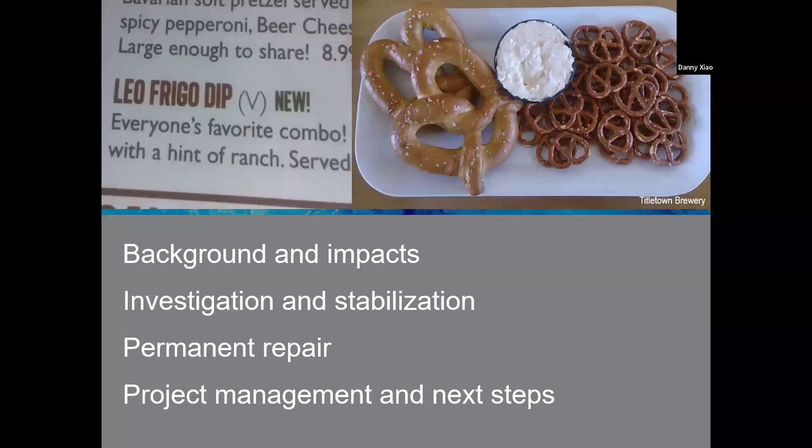So the good people in Green Bay, they had a sense of humor about it when this bridge closed. They actually came up with an appetizer for that called the Leo Frigo dip. So, all right. So first a little bit, we're going to touch about this to help orient us. One thing I want for not just the folks here in the room, but also online to understand, we're not using some sort of a fisheye lens camera, Photoshop, etc. Every time you look out at this roadway and you see the dip, that's real. That's not exaggerated in any way.

It's a 2-foot dip. So again, to get us oriented, some fundamentals talk about what we refer to as day zero, how the emergency relief process comes into place, some of the initial PI and traffic that we had to consider, as well as construction impacts for the US 41 project that was underway.

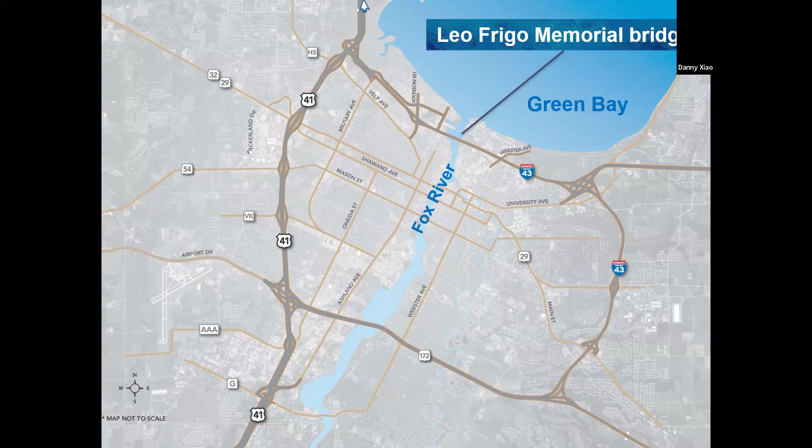So again, to orient ourselves on the map, the Leo Frigo Memorial Bridge is there at the mouth of the Fox River, where it gushes into Green Bay and ultimately into the Great Lakes. It's in those final couple miles of Interstate 43, which you see kind of wrapping around and then heading down along Lake Michigan to Milwaukee, and then obviously to Rockford. US 41, which is now Interstate 41, continues to the north towards Michigan, also heads to the south, taking a different path towards the Milwaukee metro area.

So a few fundamentals about Leo Frigo. Again, keeping in mind, we're talking about 2013. So Leo Frigo opened in 1980. It was called the Tower Drive Bridge. It is a tied arch bridge. That's a special kind of bridge. It has two siblings here in the state of Wisconsin. The Hoan Bridge, which is on Milwaukee's lakefront, and the Bong Bridge, which is up in Duluth Superior. Now you're like, wait, aren't all those ports? Yes. That's why there's 120-foot navigational clearance over the waterway so that they can get the boats underneath.

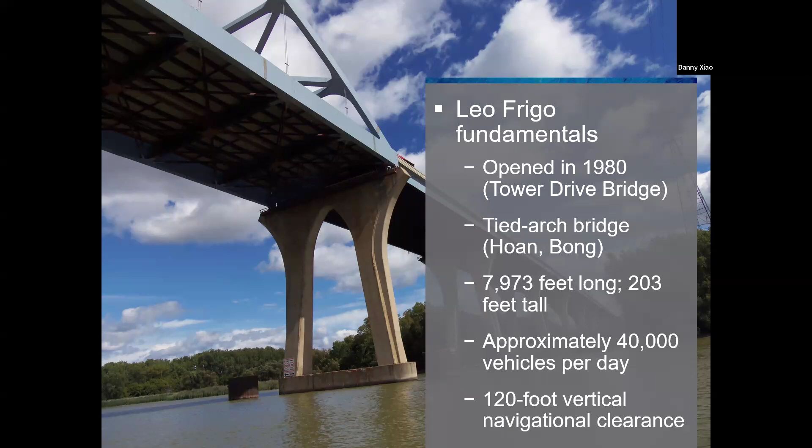So Leo Frigo, about 8,000 foot long, couple hundred feet tall, at the time was carrying over 40,000 vehicles a day, which was appropriate for the 4-lane freeway crossing that it was. So like if you ever go into the doctor's office and they're asking you about your health history, this is the health history of Leo Frigo. Again, born in 80, had a little structure repair in 88, some asphalt overlay, little structural work in 2012, 2013. It actually had been inspected a little more than a year before the event, and it came out fine.

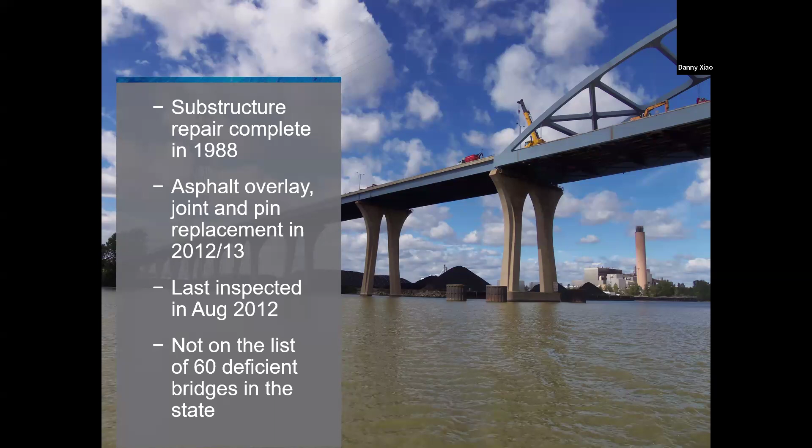So there was nothing in that structure's health history that would suggest that something interesting and devastating was about to happen. I don't know. That's your next question to deal with. I'm going to just roll on.

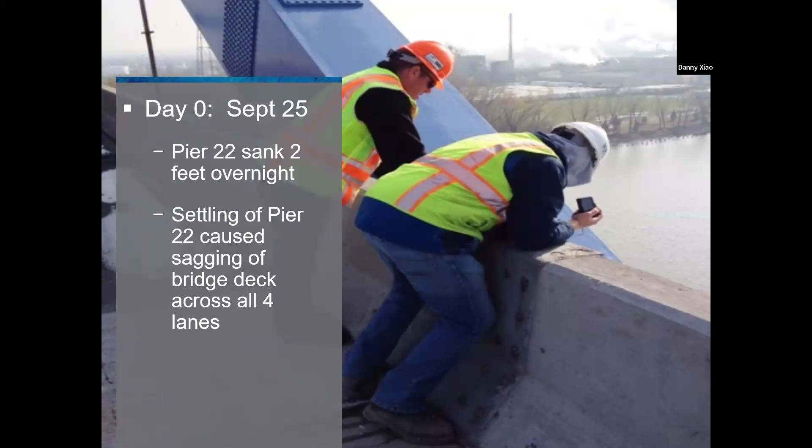So day zero, September 25, 2013, Pier 22, one of the supporting structures of that bridge, sank 2 feet overnight. And that settling of Pier 22 caused the sagging of the bridge deck across all 4 lanes. So just to orient us again, over to our far left is the Fox River. So that's in essence the middle of the bridge. And this was about 5 piers east of the river. That's the epicenter of the location of the sag.

So on day 0, September 25th, the incident first starts getting reported into law enforcement around 2:30 a.m. Within 12 hours, there's a news conference in a nondescript DOT regional office building. The governor and the secretary of transportation flew up there. This thing was carried live all across the state because it's not every day that a bridge sags 2 feet. In fact, arguably, it's something that you almost never hear about.

And so it immediately piqued international interest. So, you know, back in the day, if you were watching a network news show, they would probably show like 30 seconds of, you know, meanwhile in Green Bay, Wisconsin, the bridge mysteriously sagged 2 feet overnight. So a lot going on.

There we go. Whoops.

Okay. Following day in the Green Bay newspapers, obviously front page headlines, just showing again that significant dip, not exaggerating in any way. And so at that moment in time, September 26th is day 1.

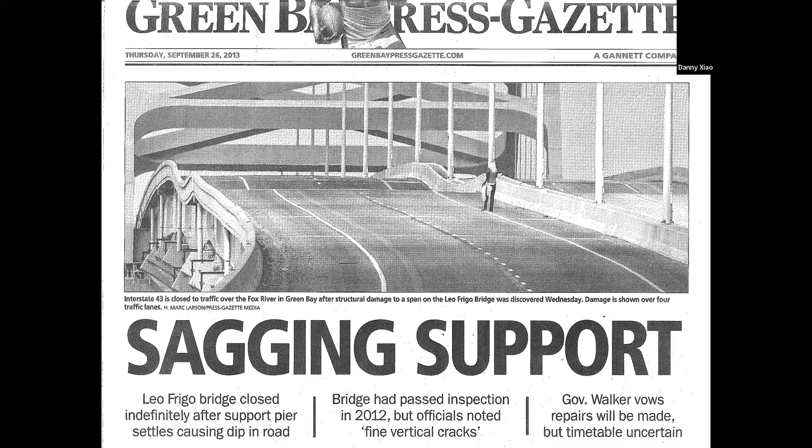Most bridge incidents, most transportation emergencies that happen, be they a flood, be they a fire, perhaps somebody left too much traffic control materials next to a bridge and it started on fire and melted it, or a fuel tanker flipped and burned and melted it. What caused this? We had no idea. So therefore, we had no idea of when it would be back open. So clearly, we had everyone's attention in the Green Bay area as well as in the state of Wisconsin.

So on the second day, and I think for folks down in the Milwaukee area most recently, but certainly all over the state, whenever we have some type of a catastrophic event that impacts infrastructure, the first step is to get a proclamation of emergency. So on day 2, the governor signed this proclamation, and that's the first step to pursue federal emergency relief funds through the federal aid highway program. Now, they can be used for one of 2 things, which is natural disasters as well as a sudden catastrophic failure like we saw here.

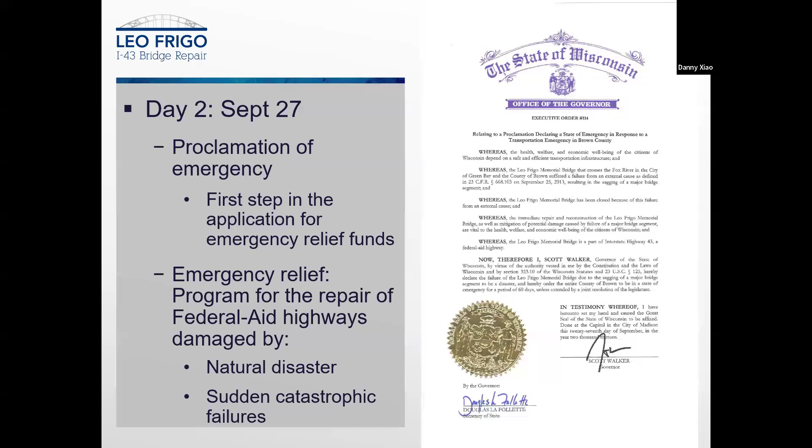Now, one thing that we did as a little bit of levity, but also to underscore the seriousness of the situation, is we actually printed out copies of that declaration. And when we'd have meetings and people would talk about how, oh, well, we need more time or we need to check in, we would kind of roll out the emergency declaration and say, yeah, but we're going to need you to decide in the next hour. We're going to need a decision at this meeting. We don't have a lot of noodling time on it. And so that was very effective.

Now, from a budget tracking standpoint, of course, any money that flows in has to be accounted for. And what helped us is that we were already in the midst of the roughly $1.3 billion Interstate 41 reconstruction project up in both Green Bay and Oshkosh. So from that standpoint, we had a lot of the tools and the tracking in place to help us know where all the costs were going to. A lot of FHWA coordination along the way. And some of the things that were required in terms of different cost categories included, of course, the flat out cost of construction. But there was a lot of engineering that went into that.

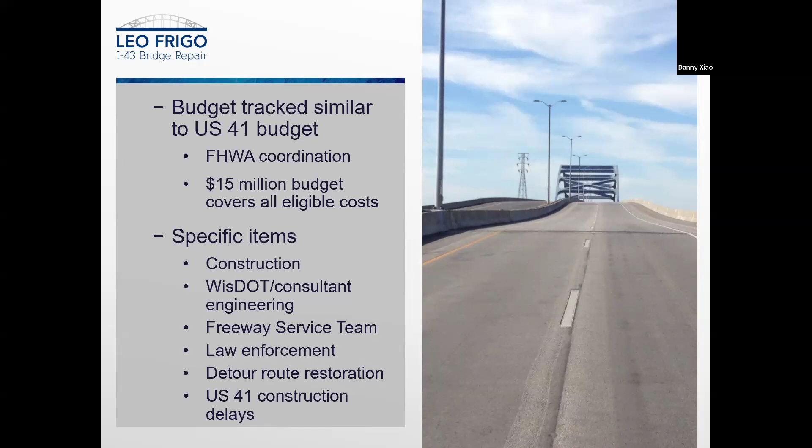In order to help manage the traffic, we had this group of vehicles called a freeway service team that would be out there to help clear motorists off the road, change a tire, give them a gallon of gas and get them on their way. Additional law enforcement support in order to keep things rolling, as well as the detour routes. Some of the detours initially weren't roads that are necessarily built for interstate traffic. And so there was a need to do some restoration of those as well.

So in those first few days, as you can imagine, as with any breaking news story, public involvement was pretty intense. This again is another shot from that initial day 0 conference. And really the focus was on 3 things. Danny actually mentioned it at the front when he was talking about what we do. Number 1 was safety, making sure that we were keeping the motoring public safe, as well as the individuals who were charged with going in and kind of unraveling this mystery. Also, alternate routes, helping people, even though this major artery's been shut down, to continue to move around. And then underscoring the investigation and commitment to repair.

So this is not like one of those CSI kind of shows where you're able to just go in and by minute 57, you've got everything figured out. But yet that's kind of the appetite of folks, that we'll be able to just click our fingers and get the answers right away. And so just letting folks know that we were on the case, we're making progress, but it was going to take a little time.

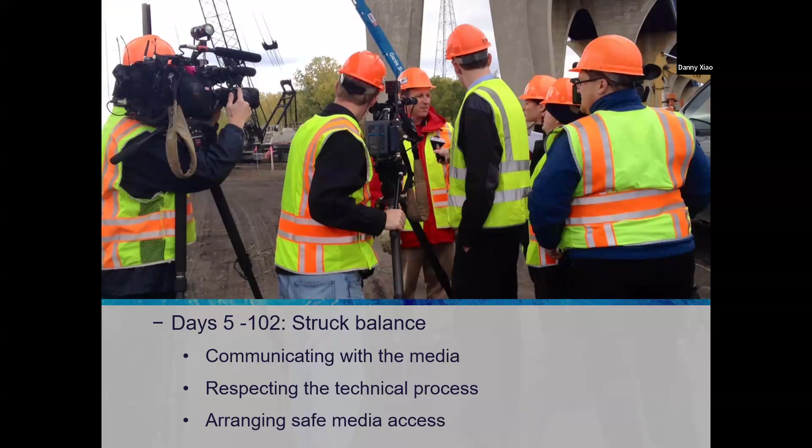So once we moved past that initial burst of media interest, then it was about making sure that people would still have questions. And so recognizing and needing to satiate that curiosity is making time, making availability. So sometimes we were able to host an event like this out on the actual site, after giving the media folks their appropriate PPE in terms of hard hats and vests.

And then just sharing with them kind of where we were with things on the project, which was, again, important to keep them safe, but important because unfortunately, sometimes if not granted those opportunities, folks will take unnecessary risks that could result in themselves getting hurt or even killed. So again, we were working together, sharing the public interest.

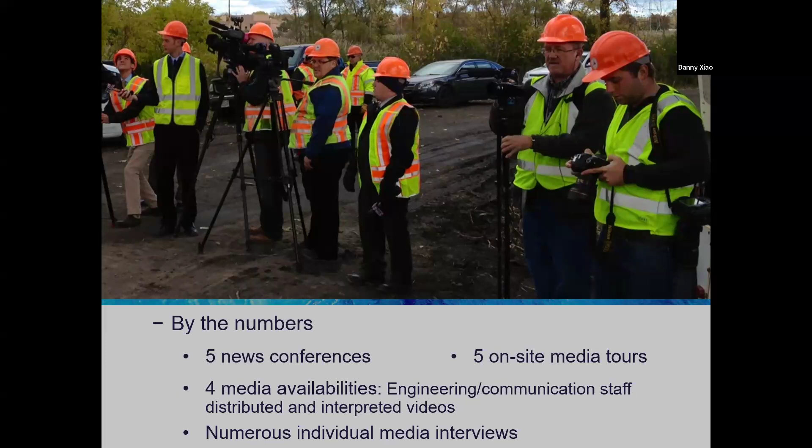There's another briefing that was held up there. So we had 5 news conferences as well as 5 kind of on-site media tours. Sometimes it would be as simple as just letting folks know, hey, we're going to have somebody from the project there for a couple of hours. Did you want to come in, ask them a few questions, film it so that you could then show it on the news. So definitely a lot of media interest, not just from the Green Bay market, but from the Madison, Milwaukee, and Wausau markets as well.

So at the end, the newspaper published a rather positive editorial, really praising everybody together who cooperated, worked, and was able to get the bridge back up. And now you're probably saying to yourself, well, Brian, we're like 12 minutes in. That's it? That's all your presentation is? No, we're going to go a lot deeper into a lot more of these issues here.

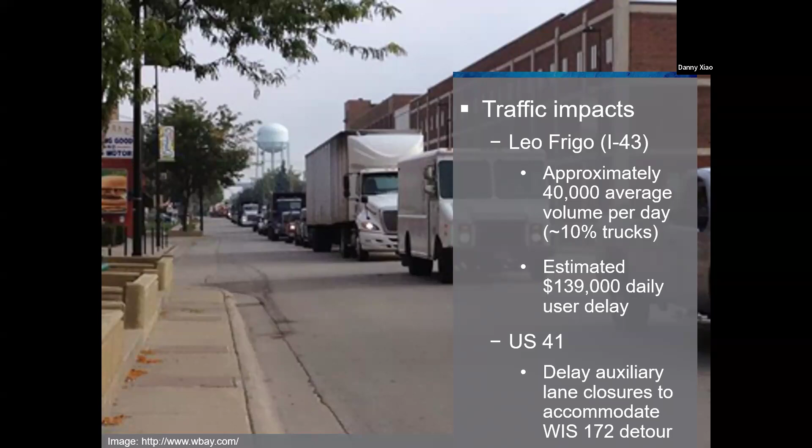Highway 41, Interstate 41, sometimes you're just gonna fall into luck. And in this case, the luck that we fell into is we were about a week or 2 away from a stage change on that interstate reconstruction, where we were about to take away lanes of traffic on Interstate 41, then US 41. Well, as we saw in the previous slide, it was destined to be our alternate route. And so we actually negotiated and paid the contractor to delay that stage change so that we could accommodate more of the traffic on those freeway detour routes.

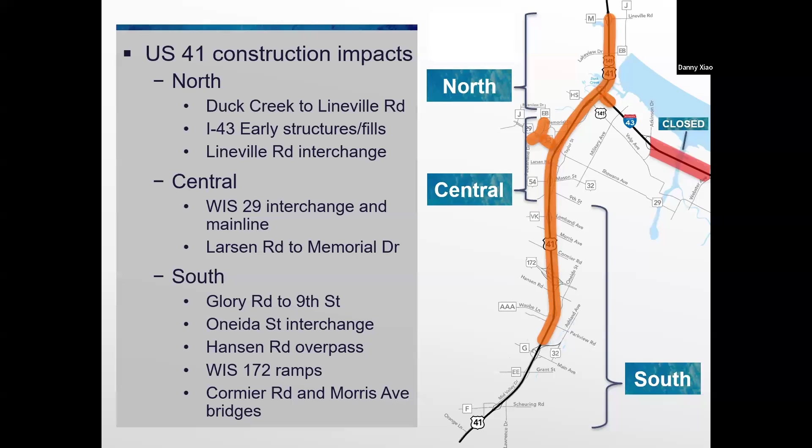So that large green, orange looking thing, which is not a circus balloon animal, is in fact all of I-41 that was under construction at that moment in time. Not going to read the list to you off of the left. Suffice to say, there weren't many opportunities for us to do anything but put folks on 41. And so anything that we could do, again, whether it was the freeway service team or just working to delay some of those critical stage changes in order to make the traffic impacts as little as possible.

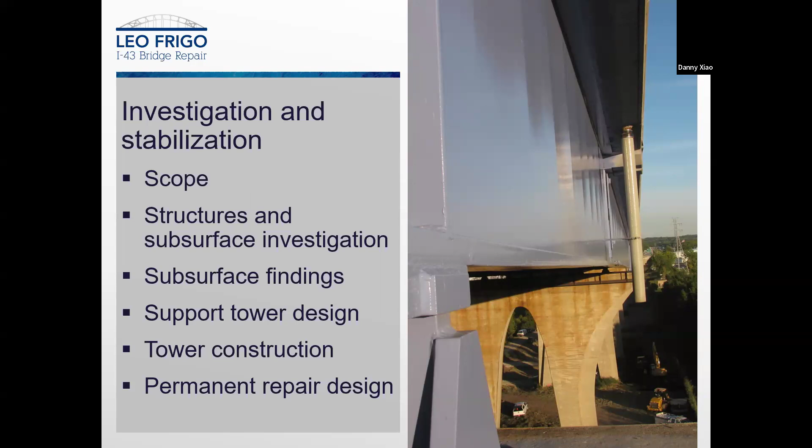So now we're going to zero in from those kind of traffic or public involvement effects into investigation and stabilization of the Frigo Bridge. So those things on the left, we're going to zoom in on each of those in greater detail so that we really start trying to walk each of you through that same sort of engineering inquiry process. When you don't know what caused something and you see the effect, how you work your way toward ruling in or ruling out different things.

So here we are. It's day one. Okay. And part of what we want to do is, of course, do a little recon on the site, look for things that are most obvious, not just on the site, we'll call it at ground level, but at the structure level, which you may recall was up to 200 feet in the air, as well as geotechnical exploration.

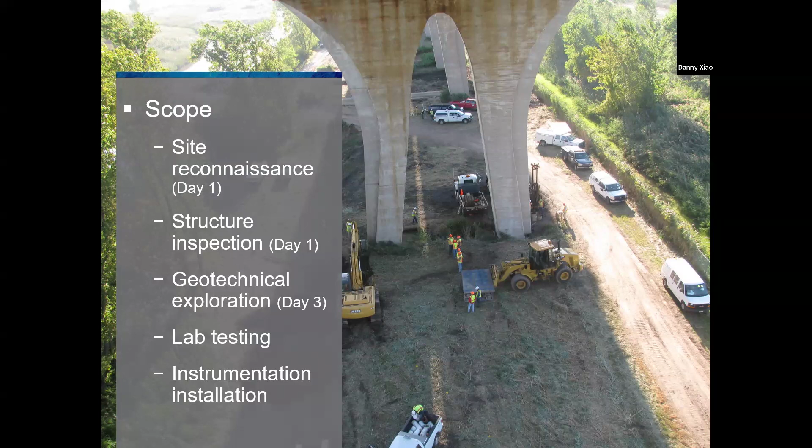And then as we were gathering this information, working with our partners to test things, to install instruments, to try to get more understanding of what some of those root causes are. So starting with structures, again, your bridge pier just sank 2 feet. You probably should not go rolling up there with heavy equipment. And so we wanted to take a real systematic approach, starting first with both the structure and the deck.

And so we wanted to make sure that we had a warning system in place that if it detected movement, it would very quickly and very loudly alert everyone within the area to be able to clear out of the vicinity of that. So again, starting with our core value of safety, we established kind of a red zone near Pier 22. Again, that's the epicenter. We don't know what's going on, so that's the area we want to be the most careful about.

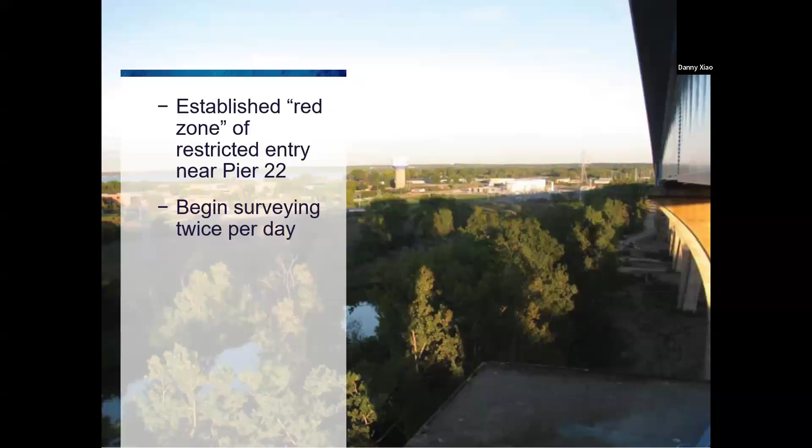Now, part of what we did to determine what additional movement may occur, we set up and started surveying, taking survey points twice a day, just to again confirm in our minds, are we seeing any movement, a little movement, or a lot of movement?

Now, this is October right now here. It's raining outside. It's fabulous. So Green Bay is a lot further north and east of here. And sometimes it rains in September. It's not always dry in September.

So with the structure inspection came structure inspection challenges. So here's a scissors lift we were hoping to be able to use on that day, and you'll notice that it's buried axle deep in mud. So a lot of the ground that was beneath the Leo Frigo Bridge included that lovely invasive species known as Phragmites and a lot of other muck. I should say ground surface that really wasn't intended to drive on. And so every day was a learning period or an adjustment.

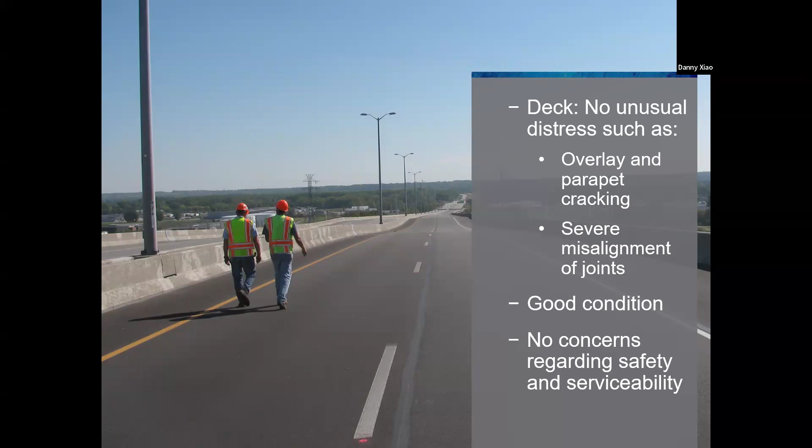So in terms of the structure inspection, they started with the deck, even the part of the deck with the dip in it, and did a physical walkthrough, physical inspection. And, hey, we lucked out. There was not anything unusual. There was a little bit of cracking, but there was nothing really overtly significant. The joints were all still lining up together. So generally things were in good condition. So again, that comment I mentioned about luck, it was one good thing we like to see.

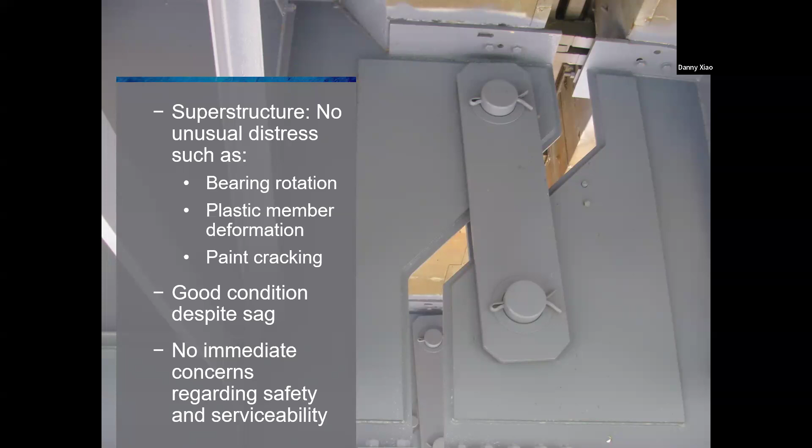So then we move from the deck down to the superstructure. And once again, no unusual distresses. There was certainly a little bit of deformation, but it was in that elastic part of the deformation curve. We hadn't reached the point where things were so deformed that they couldn't be put back. And again, a little bit of paint cracking, but nothing significant. So in spite of the fact that the bridge deck had just settled 2 feet, the superstructure actually looked pretty good. Not really anything immediate that popped out of it.

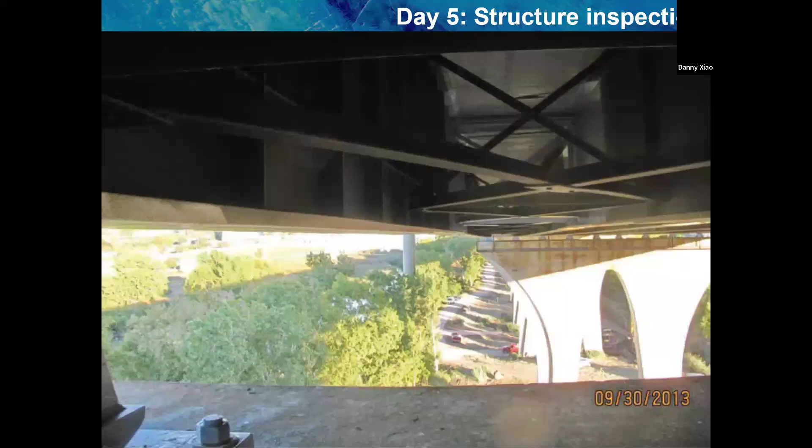And so here's another shot. This is obviously from up in the superstructure from the inspection. As you can imagine, at Pier 22 itself, you would see a little bit of bending because, again, it settled 2 feet. So there's a shot of that.

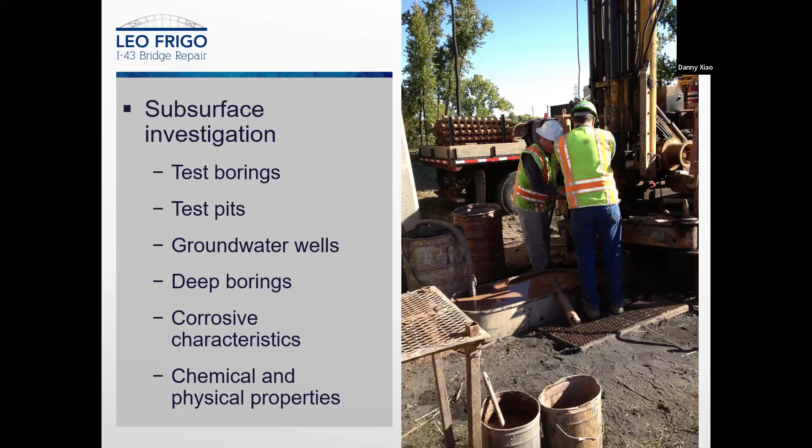So now that we had kind of examined and cleared the structural aspect of it, it was time to turn our attention to the subsurface investigation. And, again, we undertook a really rigorous regimen of trying to look at what was going on because the bridge settled. It didn't happen from the top, so there must be something going on. So test borings, looking at groundwater and corrosivity. So even for those civil engineers like ourselves that maybe aren't heavy into the chemistry and biology aspects of it, we're going to be doing a little recollection of what that would look like.

That's what we were doing because we knew we were on the clock. So it was like, well, what if it's microbes, like actual living cellular beings that are doing things? And what about the corrosiveness? What about electricity? So a lot of different things, some of them, as it turned out, we were able to rule out. But when you're on the clock, you pull out everything.

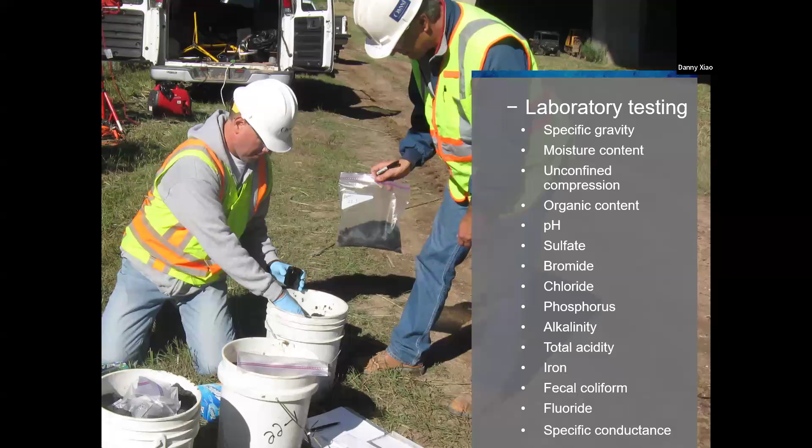We're not going to read this list to you one by one, other than you probably will recognize them a little bit from some of your geotech engineering courses and probably some from your chemistry courses as well. But that's just kind of the laundry list of the lab testing.

So as we were going through the testing, we were starting to zero in on some potential causes. Was it something to do with the piling? Again, we hadn't at that point gotten to that, but we were beginning to have our suspicions that might be an aspect of it. Another, bedrock cavity, which is not Fred Flintstone with a toothache. It's, if you can imagine, an open area beneath the bedrock where, for some unknown reason, suddenly that cavity collapsed, or something with the soils. But again, more to follow as we work our way through this investigation.

So on day 3, that alarm that we saw there previously, yes? Tell us a little bit about how you're starting. We will. Absolutely. Great question. For those of you online, he was wondering, get a little bit more info about how the pier was constructed. And the footings that will become very important here.

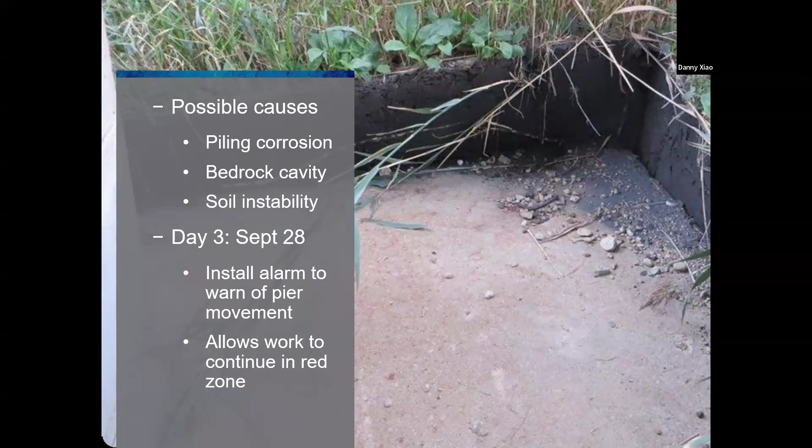So on day 3, we were able to get those alarms installed, and it allowed us to get down in there. Day 4, again, we're down there, we're looking at Pier 22, the epicenter, and they did a test pit. They looked at one test pit, and there's a shot of what that looks like. And in one corner, they went down 3 feet, and it's like, hey, drum roll, this is it. Smoking gun, nothing.

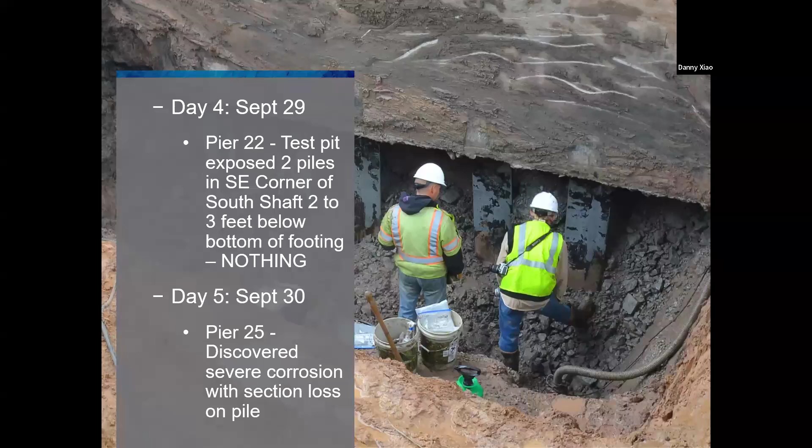Meanwhile, a day later, over at Pier 25, 3 piers away, they found severe corrosion. And they're like, well, wait a second. The pier settled at Pier 22. I'm over here 3 piers away from the river, and now I have corrosion with section loss in the pile. What's going on with that? So day 5, we also found at Pier 21, the pier next door to 22, also section loss.

So it's like, okay, what does section loss mean? So if you can imagine this entire pile being whole, that's what's left of it. Kind of looks like an old steel Pabst can that you found buried out in the field for 50 years. But really, from a construction standpoint, a more serious standpoint, that pile, one of many piles, was intended to exist in its as-built state and extend down into the ground. And now you look at what we have.

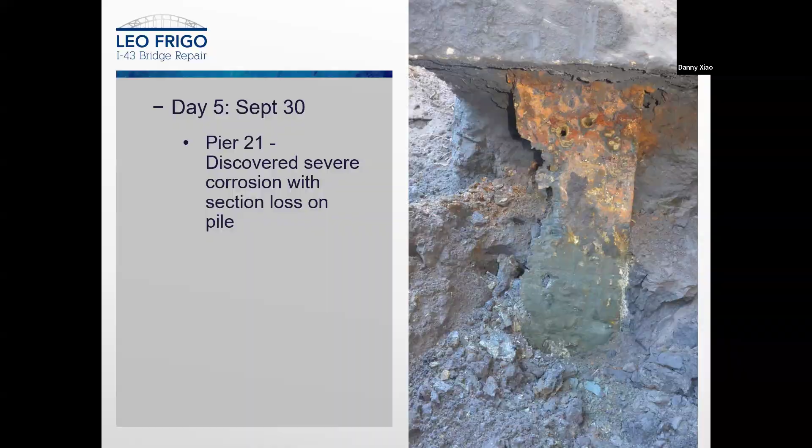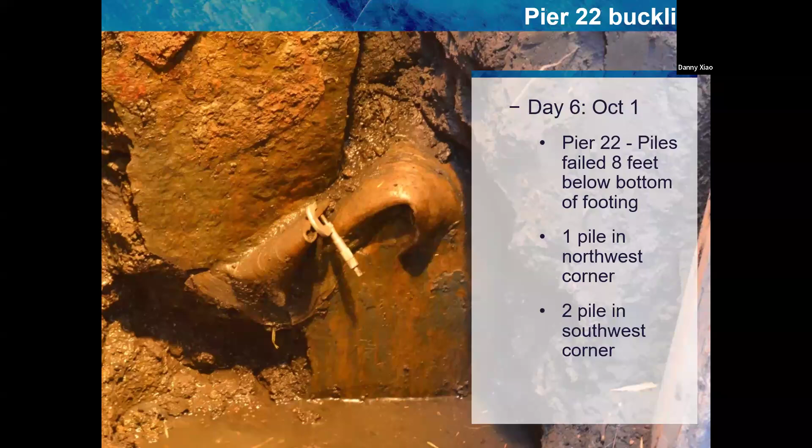And so then that chases the whole investigation piece further, where we go, aha, we have corrosion on the pile, but what was causing the corrosion? So here at Pier 22, if you'll notice how the pile comes down and then kind of bends, basically at Pier 22 itself, it collapsed on itself about 8 foot below the bottom of the footing. So we found that on day 6. And there was 1 pile in one corner and 2 piles in a different one, both of them on the west side, that all failed. And that's again resulting in the Pier 22 buckling.

So in terms of what they found in the subsurface, there were 3 different things that made for, shall we say, kind of interesting or unique conditions. The first is porous fly ash fill. What is fly ash? Fly ash is a byproduct that comes from power plants. Well, how would porous fly ash fill, aka byproduct from power plants, get in my fill under the bridge? Where would it come from? Well, it came from the power plant that happened to have existed right near where the bridge was built.

Perched groundwater. So what that means is, if you can imagine that you have a solid, say, layer of rock, and typically groundwater would go from the ground and then kind of rise up and down.

But it's essentially an impermeable layer. And so if at the time when they were building it, they weren't aware that there were certain layers that were impermeable, it would mean that underneath the ground there would be sections that typically wouldn't be going through the same kind of rising and falling of groundwater that you would typically see.

The third finding is microbial influenced corrosion. And you're like, well, wait. Microbes, like living things? That means that there has to be something living under there. What would that be? Well, it turns out that in addition to using fly ash as fill, they also used a lot of wood pulp byproducts. You're like, well, that's crazy. Where would they find wood pulp byproducts from? From the wood pulp plants that were right there next to where the bridge was built.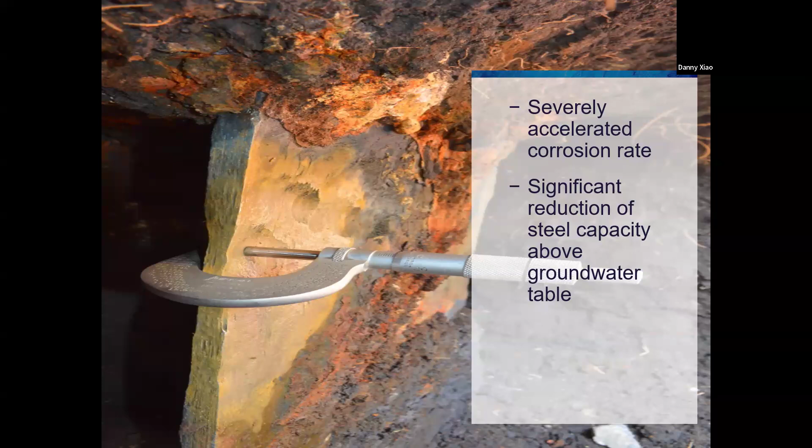So again, built in the 70s. Clearly, we wouldn't today use fly ash or wood pulp byproducts as fill material next to our piers, but hey, it was the 70s, man. So here's another example of the corrosion loss. So again, this is your typical steel pile, and you'll notice with the micrometer that it kind of comes down. Again, particularly above the groundwater table is where we would see a lot of that kind of reduction.

All right, so in summary, now that we have completed our investigation, we found that at a minimum, we need to do some bridge repairs. We've looked for those factors and we found them at 21, 22, 23, and 25. So 24 did not show, we didn't find those there, but because we remember number lines from elementary school, 24 is perched right there between 23 and 25. We're like, well, we'd rather be safe than sorry. So we're just going to look at all 5 of these.

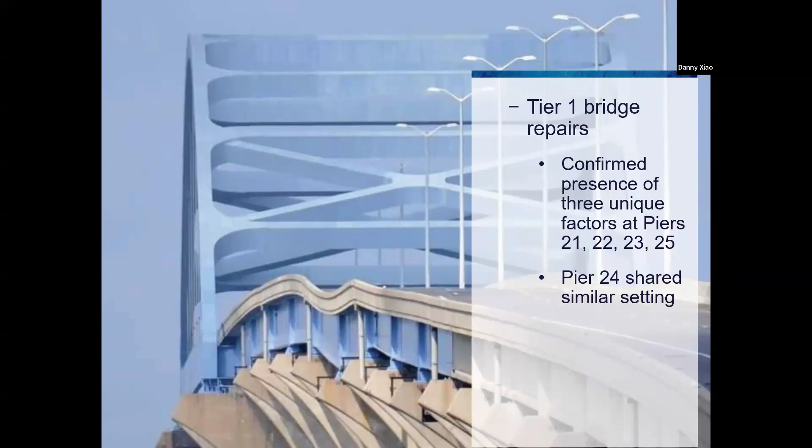So what does a tier 1 bridge repair look like? Well, first of all, it's stabilization. Before we could really dig into a permanent design, at this moment, we didn't know what's going to happen. And so we wanted to stabilize Pier 22, and we wanted to make sure that it would then reinforce the structure so that we would have no further movement. So we began to look at a support tower design. And so just trying to figure out, well,

Iron oxidizing bacteria are common in shallow wells in Brown County. Well, thank you, Ken. As an added bonus, this bridge is in Brown County. So a very relevant point.

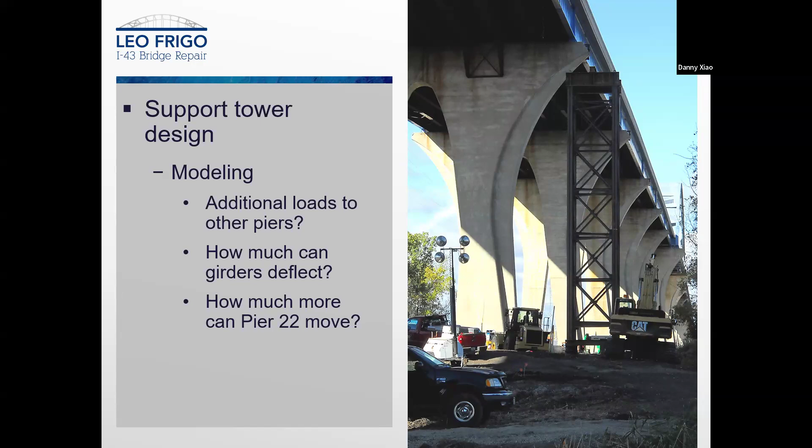Oh, that one. Okay. So it required a lot of modeling to determine what the right thing was in terms of the design. Now, after 12 years, I can finally remember without prompting that DL stands for dead load on this slide. So this upper chart reflects what we would typically expect to see. Hopefully for those of you who've had structural design courses, some of this will resonate with you. When it's in equilibrium, we'll see some areas that will be in tension and others in compression, keeping the whole structure in a kind of balance.

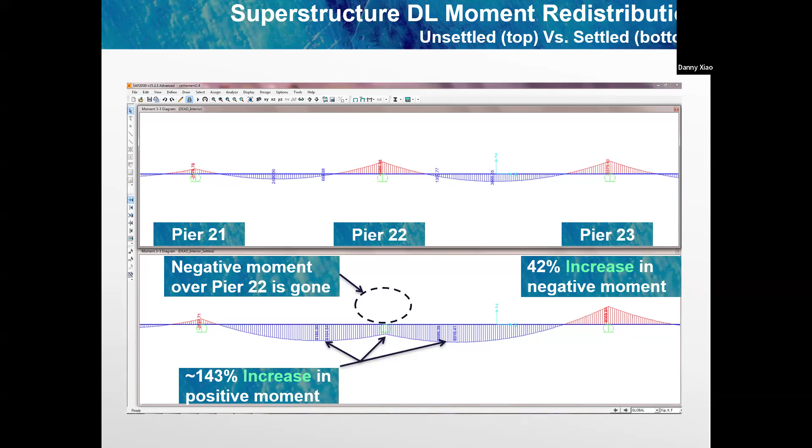Now, this lower exhibit shows that with Pier 22 gone, we're actually resulting in a huge positive moment at that location, as well as a huge negative moment increase on the other side. And I'm gonna skip the slide. And here we go. So they did a lot of structures modeling. Did I mention I'm not a structural engineer? And so the results were that everything was within capacity.

So as you've learned, we have this thing called factor of safety that's built into the codes, that's built into the structural design. This is why you do that, so that if you're 1% off, things aren't going to snap. So everything was in the elastic stress range, which means no permanent deformation, and we could possibly jack it back into its existing position. Again, more good news. How close were we? If that settlement had been another foot, all bets are off.

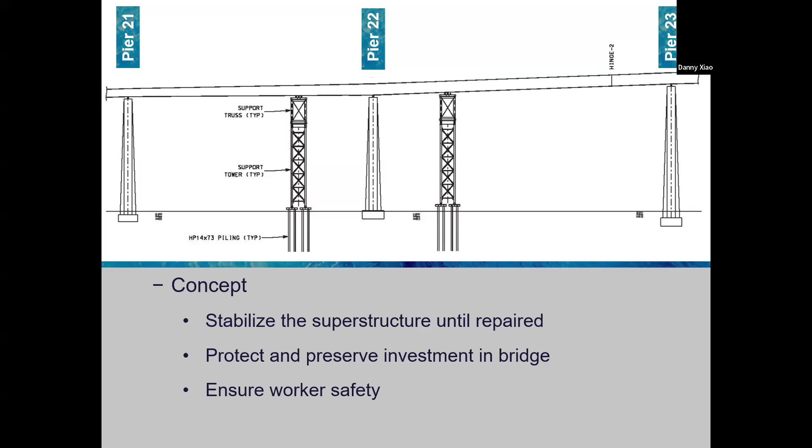So for the stabilization, they zeroed in on a 2-tower concept to basically hold the structure securely in place until we do the permanent fix, as well as to make sure that the people doing both the temporary and the permanent fix remain safe. So here's a schematic of what that would look like. In essence, it would remove about 1/4 of that overall load from Pier 22 and distribute it to these 2 towers.

Now, usually with construction projects, progress is measured in years in terms of plan development, decisions, processes, lettings, design, finally getting them to construction.

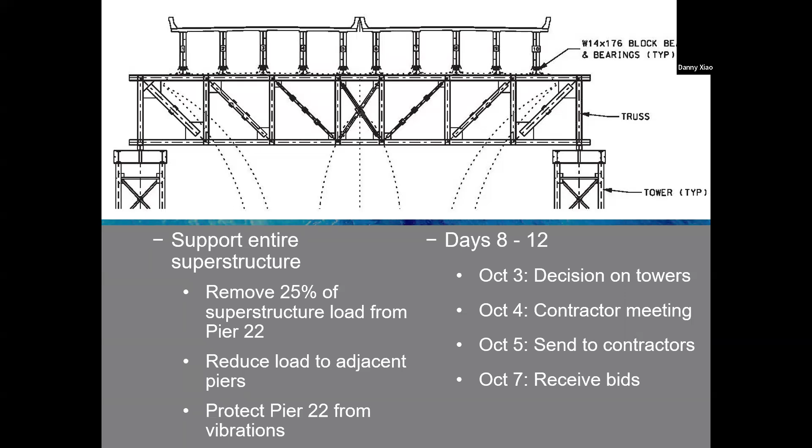This is done in 5 days. Okay, we're going to do a tower. All right, call up 3 contractors. We're going to meet tomorrow in the conference room. Okay, got enough of their feedback. Here's what we think we want you to build for us. Could you get us something back in 2 days? Usually that process I just described is years. This is what you do with a transportation emergency.

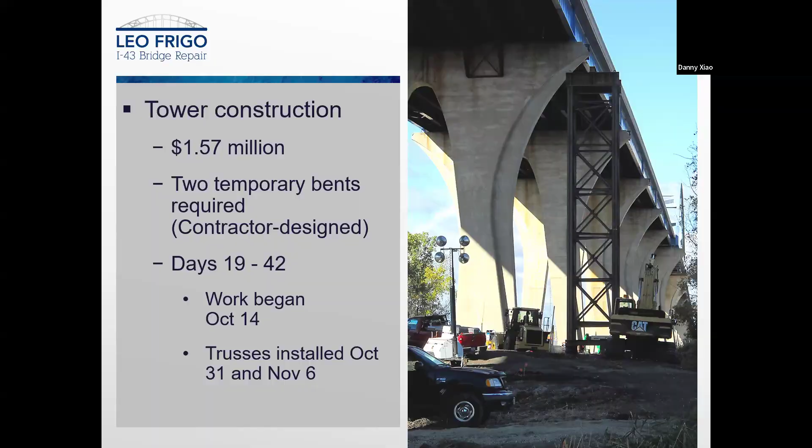So ultimately, at a bargain cost of $1.57 million, they came out and they built these temporary towers, and they were able to get it done in basically a couple weeks. So, recognizing that time was money, certainly that was part of it, but it was intended to be exceptionally robust.

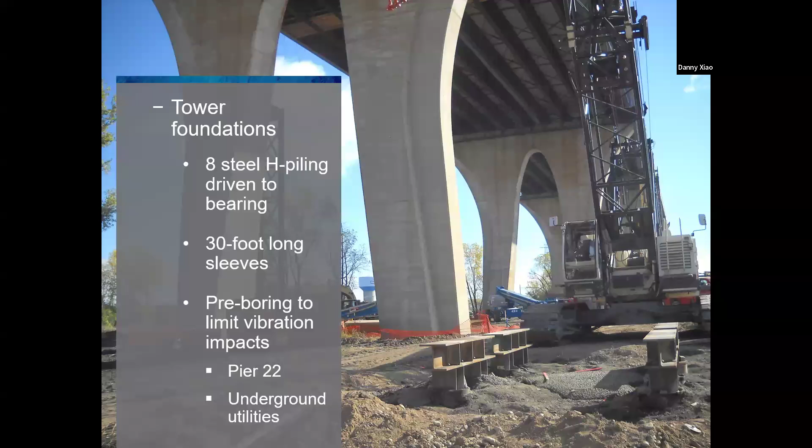So for those of you who have a hankering for a little more detail, basically it was 8 giant steel H piles that were driven all the way to bearing. And we also had to do pre-boring to limit the vibration. So instead of just pounding it straight into the ground, we started by drilling into the ground because we didn't want to disrupt the underground utilities too much. And it's like, well, no, you never want to disrupt utilities. I mean, after all, what's the worst that could happen? I think I have something here a little later that talks about it.

So here they are welding the tower. Oh, it's a fuel pipeline. You don't want to blow up the fuel pipeline. Of course not. So that was definitely a challenge. And so what we'd have to do is, typically if you've ever been out at a construction site where they're pile driving, you can hear the pile drivers going pretty quick. Well, here it was pile, monitor.

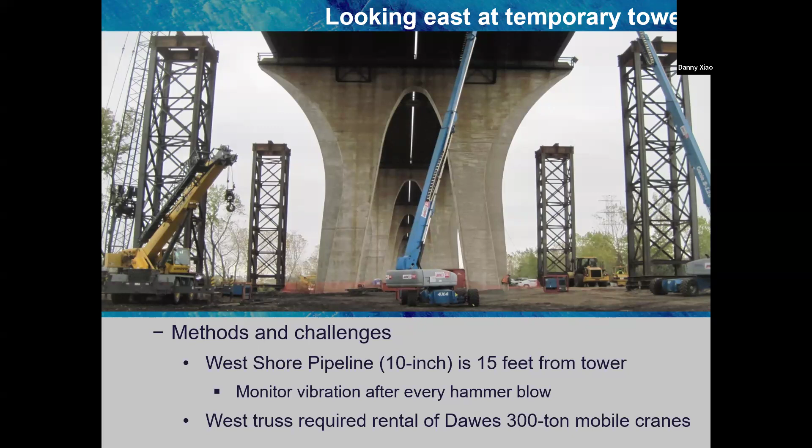Okay, are we still good? All right. Pile. Okay, monitor. Are we still good? As you can imagine, it lengthened the amount of time, but we didn't want to blow up the pipeline. So there you go. And it was 15 feet away. So they had to rent a couple 300-ton cranes. So here you see those are the 4 towers. It's almost Lord of the Rings-ish how it looked.

But wait, that's not enough. Because again, we're engineers. We want safety on top of the safety. So we also established some lateral bracing at the 5 piers of interest. Now, what did the lateral bracing do? It even further limits the potential for movement in your XYZ axis, and it really binds it together. So you can't have just one pier or one component go rogue and start settling. It keeps everything together.

And here's what it looks like when it's going down the road. And yeah, that's a lot of pounds. Even if you convert it to tons, that's a lot of tons. So nearly 600,000 pounds in the trusses.

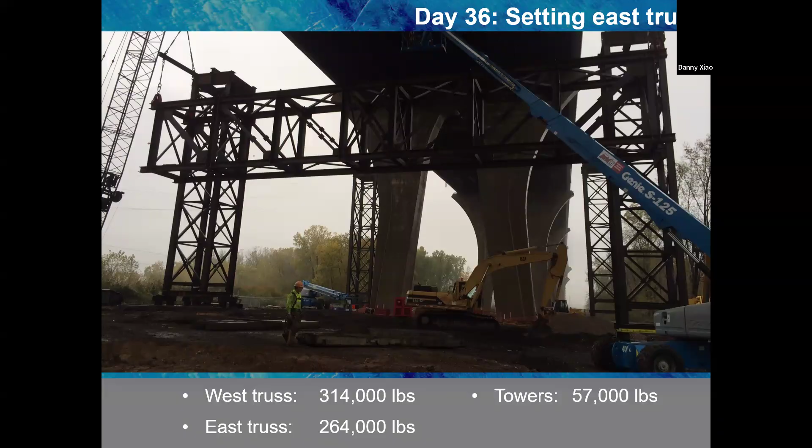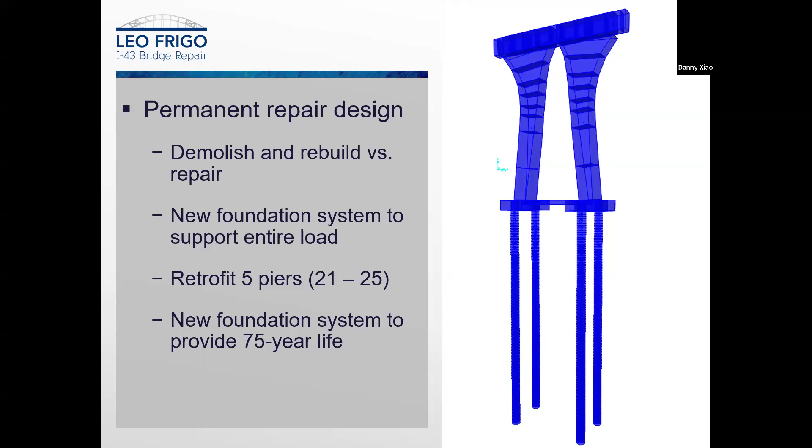So now we're going to pivot to the permanent repair. So we had to look at options. What are we going to do? We've got it stabilized. Are we going to demolish the entire piers? Are we going to rebuild them and repair them in such a way? And what the smart structural and geotech people came up with is, we're going to come up with a new foundation system. We're going to do something that's going to last for 75 years. And we're going to do it at those 5 piers that we have interest in. And you're like, well, you're not going to give us details. Well, yes, I am, actually.

Then we're going to drill holes through the footing, and we're going to use post-tensioning so that the new part of the footing and the old part of the footing are all connected together. And then instead of these 50-year-old piles sticking out in the ground, we're going to go with 4 drilled shafts down to bedrock. And because we still don't know why the corrosion occurred, we're going to put a PVC pipe around that's going to handle the first 30 feet for all of these.

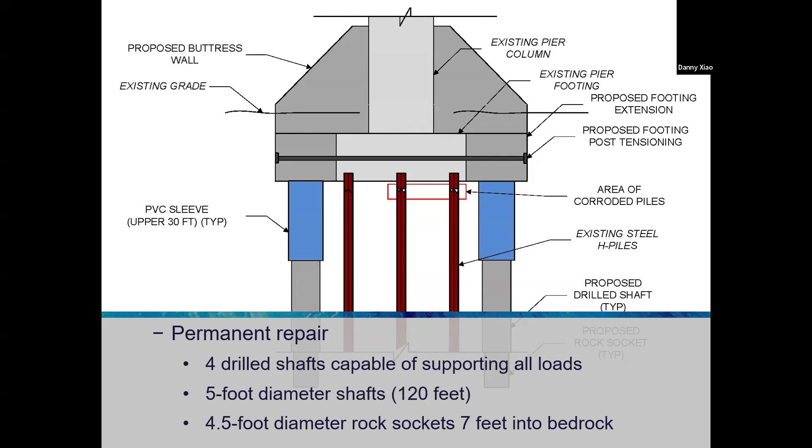So this thing is not going to move. It'll probably still be there even when they rebuild the bridge. It was going to be that robust of a design. And so here's a cutaway view that looks at that again with the existing column and footing, and then the expanded as well.

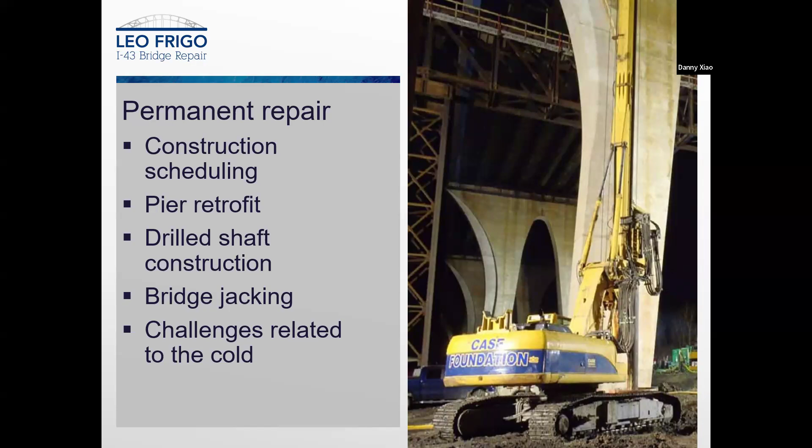So now we're going to move away from how deep is the bedrock. 100+ feet, and it varies. There we go. All right, so now we're going to talk a little bit about the permanent repair and hit on those topics in the gray box and roll on from here.

So 7.72 million is what the cost of the permanent repair ended up being. And so this is a snapshot of the construction scheduling. So in your construction course, you learn about Gantt chart scheduling. As you can imagine, because of these 5 piers, a lot of what we're doing is going to be essentially the same thing over and over again. There was a little bit of that rinse repeat.

Now, of course, because they're not doing all 5 piers simultaneously, they move from one and keep rolling on through. So again, here's 21 to 25. They're doing all those things, drilled shafts, footings, and then ultimately culminating with bridge jacking.

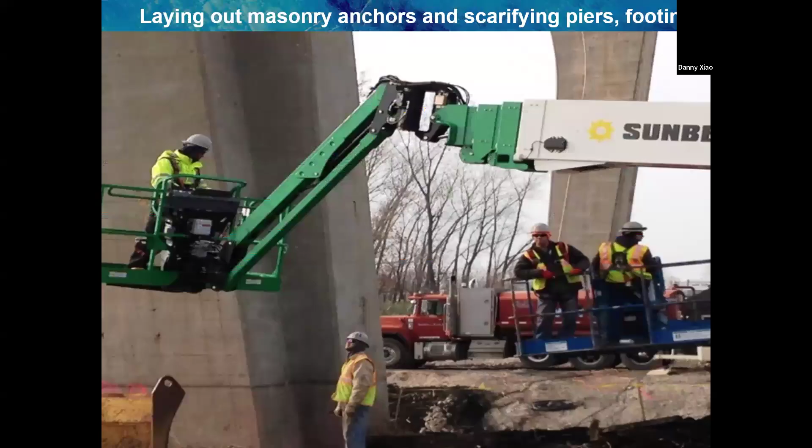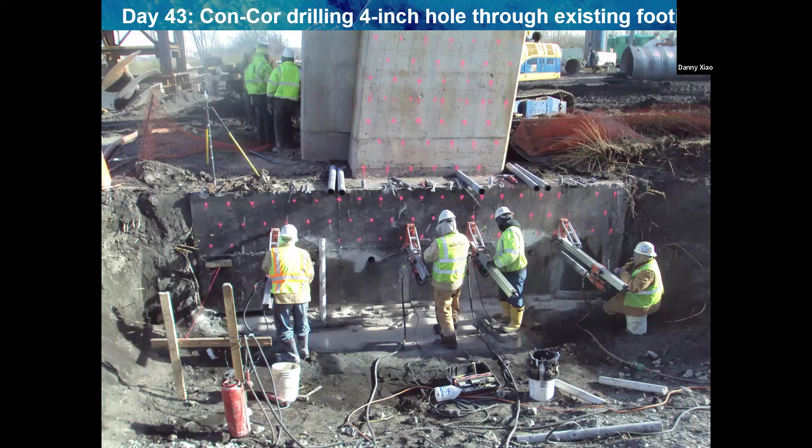So if you've ever had a project where you're trying to affix a new surface to an old surface, sometimes you have to rough it up with sandpaper in order to get them to adhere better. That's essentially what they were doing there with scarifying the piers and footings. So you may recall those columns, we were going to be building those new buttresses. So that was a piece of it. So here's what it looks like when you excavate down to the level of the bottom of the footing.

Getting down in the hole, this is as they're drilling those 4-inch diameter holes through the footing that ultimately we're going to be doing post-tensioning through. So drilled shaft construction, why did we go with that instead of pilings? Well, because pilings will not last. So resistant to corrosion, and it was also less vibration. That fuel line that we didn't want to blow up, it was still there, and we still didn't want to blow it up.

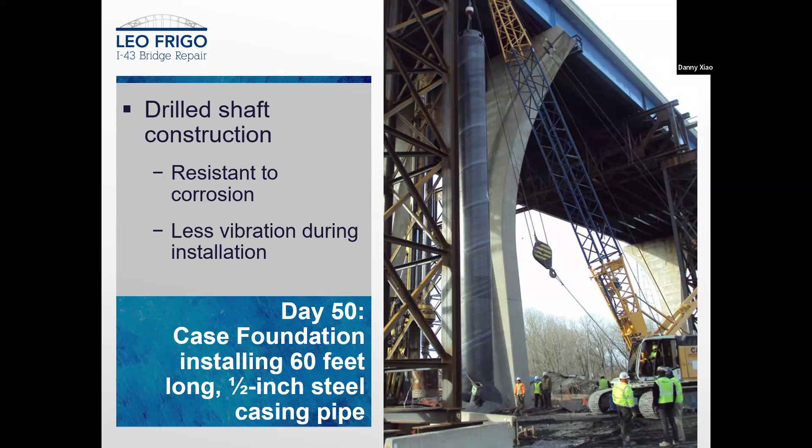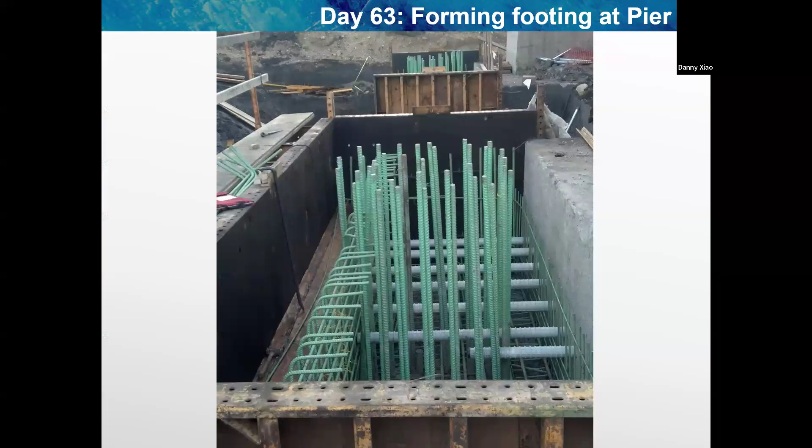So here we are on day 50. At 60 foot, this is roughly the first half of that steel casing pipe. And then here's day 63 where we're installing, this isn't the entire 30 feet, but basically a fiberglass liner around it. So as you recall, we're expanding the footprint of each of the footings. Again, very conservative design solution. We didn't want to leave anything to chance.

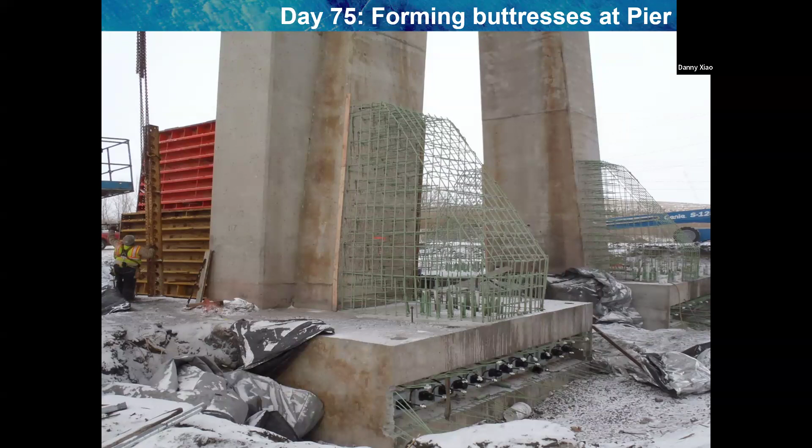So there's just a little bit of rebar in there. In fact, one of the comments from one of the contractors out there is that by the time they got all the rebar in, there was barely room to move in there. So, no room to move for the person who's in there putting it, and then no room for the pier ever to move again.

So as we start to see, this is obviously the above ground diagonal buttress that we talked about. There's the cage for that being formed. Below that, you can also see, for the existing footing itself, how they've established some of those holes for the pre-stressed cable that's going to go through. So by the time we get to day 98, there's a pour, and look, that's the new buttress. So just as they were able to do that in a matter of weeks, I'm able to show you from a plan to a cage to a finished project in a matter of minutes.

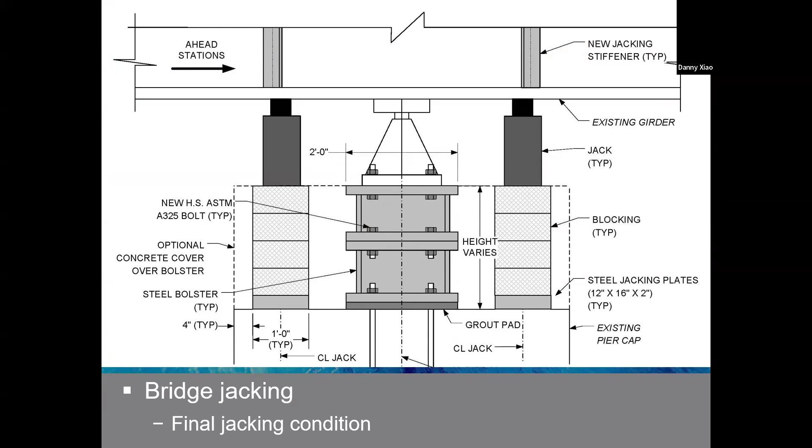So then, as you can imagine, a lot of rinse repeat work, doing the same thing on all 5 of those bridge piers. We get to the bridge jacking phase. They recognize that they're going to need to get this done. And when you're jacking a bridge and everybody is staring at you, you want to make sure that you do a lot of extra planning. And part of that is that you don't say, okay, let's do 2 feet all at once. No, you jack it 2 inches and you say, okay, how are things looking? Monitoring there at the pier itself, but also up above.

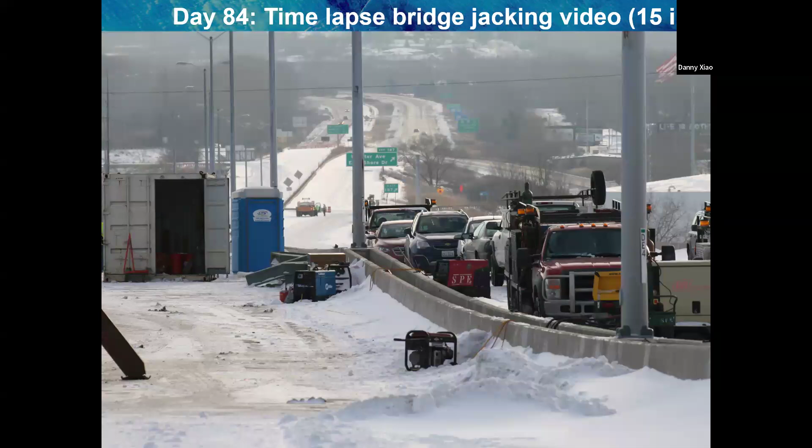So now I'm going to turn to Danny and say, if I switch to my little 15-second video, we're going to hope that this is all going to work out here. Let's see if I do this. And if I push play, okay, so I'm gonna run through this time lapse that is not gonna switch. How do I switch it onto? Oh, on the Zoom, I bet.

Okay, you know what? Okay, so we're gonna skip this for right now in the interest of time, and we're gonna come back to it perhaps. Let's see here. Ha, good.

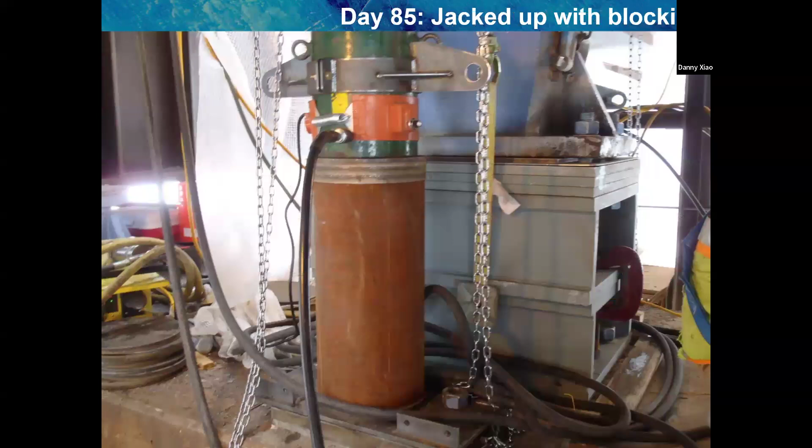Little different. All right. So as you can imagine, a lot of equipment associated with jacking up the blocking. And so you'll notice here, obviously these were some sort of digital cameras that would put orange dates on the bottom. So this was December of 2013. The first thing you've got to notice is like, well, that's a lot of snow. It must be pretty cold up there. We'll talk about that. So day 86, we finished the northbound jacking.

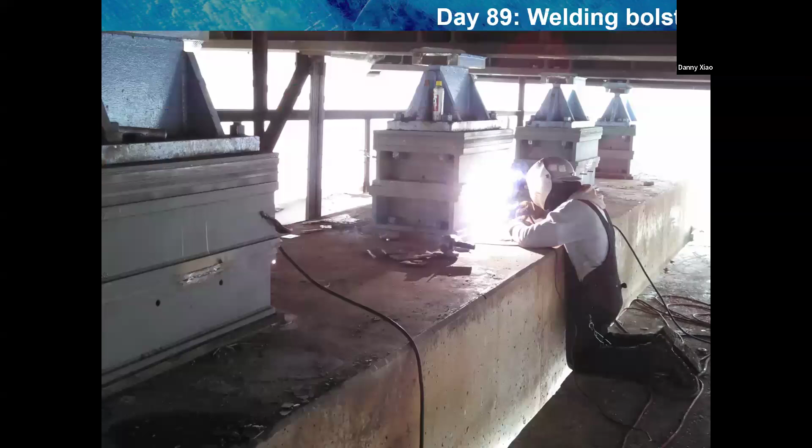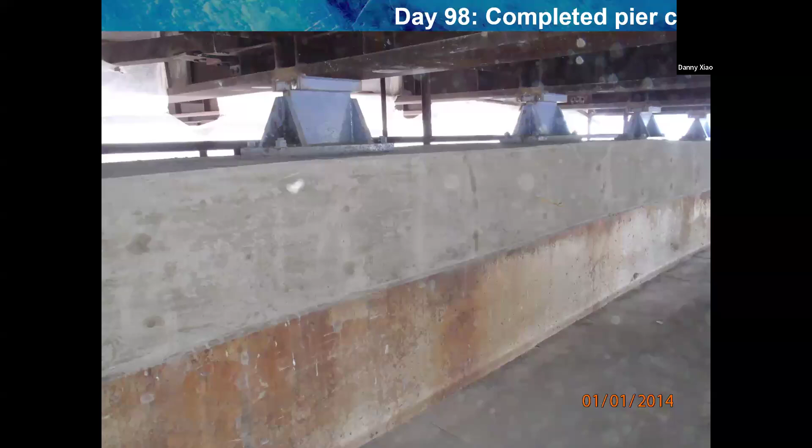And then, as you can imagine, once you've jacked it up, you now have this space. And so we had to insert essentially a bolster, kind of like a shim. And then, of course, you didn't want that shim to ever get knocked out of place, so welding that all together. And here's another shot of what that completed pier cap looked like.

There were challenges related to the cold. So during the last 51 days, from basically November of 2013 to January 2014, the high temperature was below freezing over half of them. And half of them had snow, another 5 days with rain. So if you can imagine your worst field trip or flat tire adventure ever of being out in the rain, in the snow, in the cold, that's what it was for the folks that were there in the trenches doing the repair.

There was a particular cold snap where the highs were down close to zero. And typically the contractor team had been working two 8-hour shifts. They shortened it to one 4-hour shift for that period of time because it was just so brutally cold and unsafe.

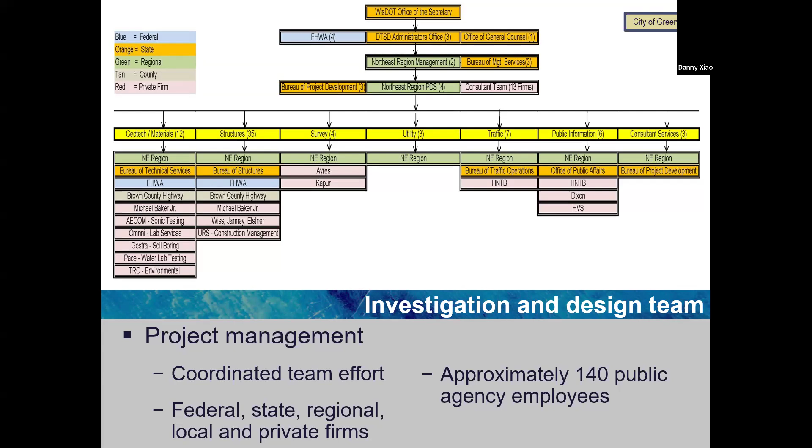If you think a transportation emergency like this doesn't get you attention from the governor's office on down, it gets you attention from the governor's office on down. So from a process standpoint, as you get out into your careers, you'll find out how exceptionally long these processes typically take. And so just for the permanent repair, deciding on a special letting, doing environmental documentation in days, a plan set within basically a week and a half, putting it out to bid and giving the contractors a full week to look at it, and then getting work started on November 1st.

It's almost unheard of, but I'm going to say this again. In a transportation emergency, you'll be asked to do things far faster, work far harder, in order to get things done because of just how it affects everybody. This was a case also where a disincentive clause was put on the contractor.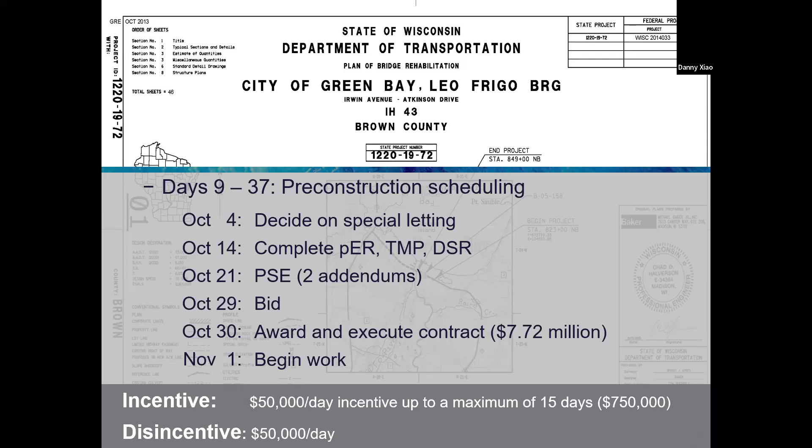Engineers that work for design firms, they put together their best guess of what it looks like, but contractors, they're in the business of really understanding and finding those efficiencies. So we really wanted the bridge open. And so we thought, well, we're going to put some money out there to do it. And wouldn't you know, the contractor finished and grabbed the maximum incentive. And we all said, thank you, because ultimately we wanted it done.

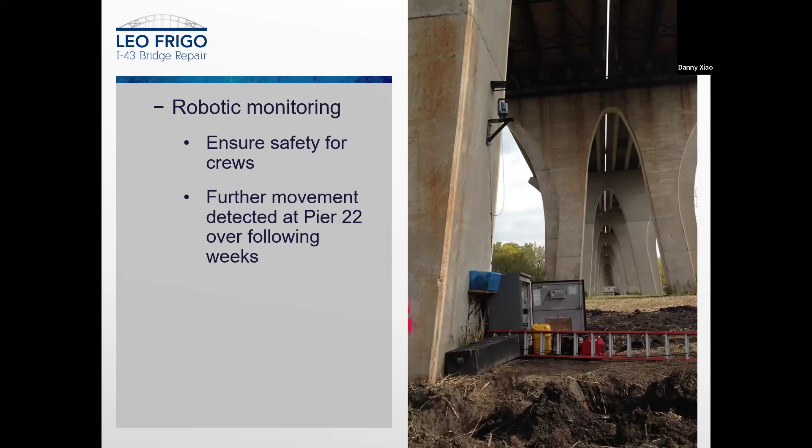So survey was obviously an important part about it, as we talked about. And then there are some random pictures we're going to skip through. We used robots. It was legal. But basically, after a while, we figured out that it didn't make sense to keep sending surveyors out there twice a day. So we were able to put up an automatic robotic survey monitor that would do that. So there's the robot right now. That's before it became sentient and tried to kill us.

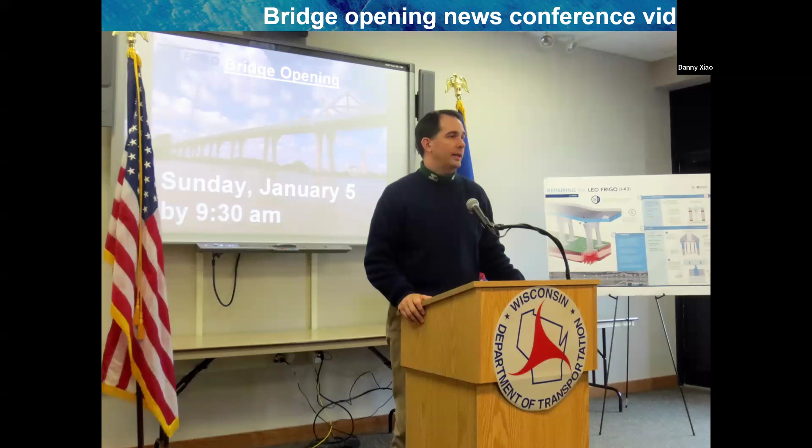And then we're not going to show the video, but January 5th, 2014, after 100+ days, that same group of high-flying characters came to Green Bay and announced that the bridge was open on day 102. So 15 days ahead of schedule. It was a very cold day. So a few things by the numbers: 27,000 hours were expended by all the different folks who put in together. They worked every day but Christmas Eve and Christmas Day. Sometimes it was around the clock, and sometimes they double crewed because they just wanted to get it done. One of the contractors said he didn't see his house in the daylight for over a month.

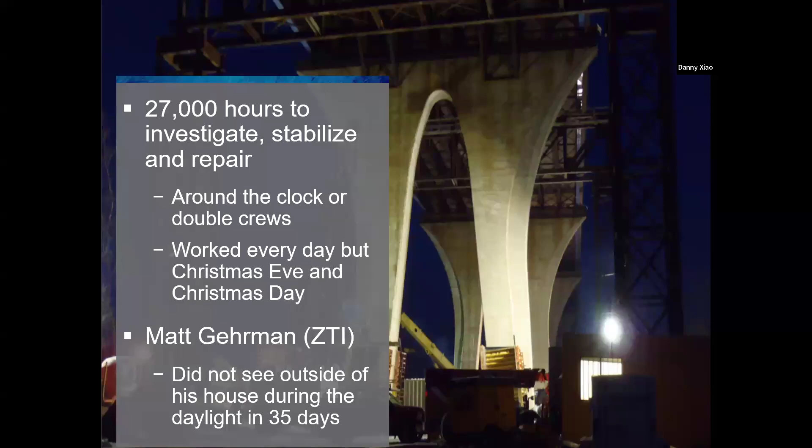Again, not hard to imagine as the days get shortest in December, but then there were also those moments where you're starting to do bridge jacking, and you hear this crunching and cracking, and you find out that it really wasn't that big of a deal. Or you've got a room full of the press, and somebody comes in and whispers, the bridge just settled another 1/2 inch or 1/4 inch.

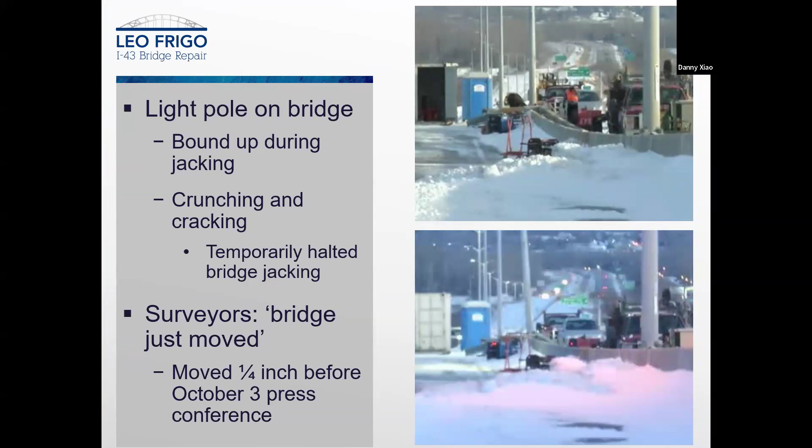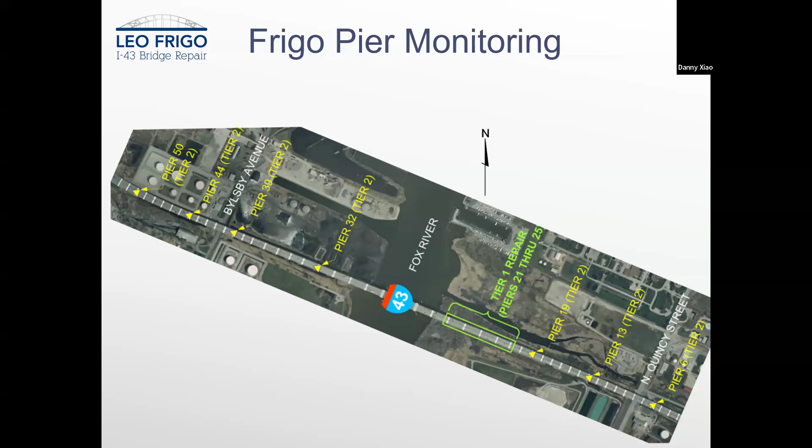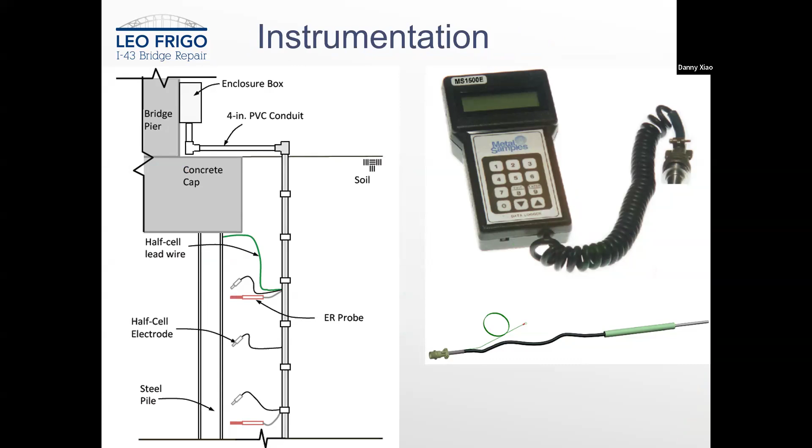So a little bit about next steps, including not only the inspections, but also some monitoring. Okay, so post transportation emergency, from 2014 actually to the present, we continued to do a bit of monitoring of the piers. And in essence, at these different pier locations, there's a PVC conduit that goes down underground along with the existing steel piles. And we use these probes and this magic piece of equipment to measure the electrical resistance, or the ER for short. And so they've been collecting numbers for a while.

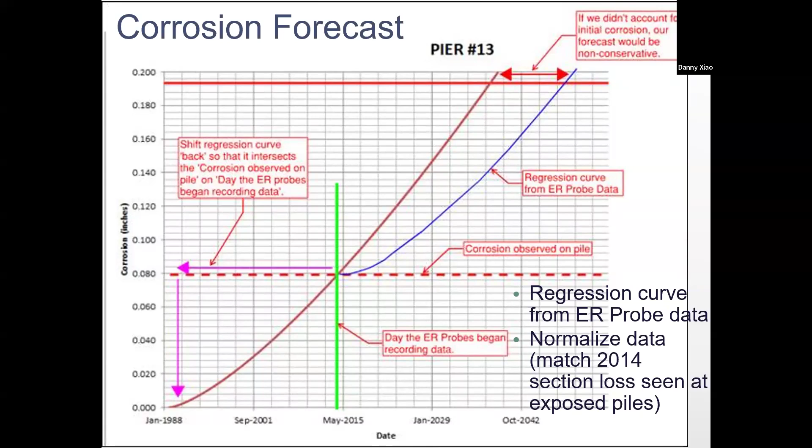I'm going to skip this graph. And even this graph is exceptionally confusing and hard to understand, but I'm going to summarize it as follows. So we know what the condition was of the various piers when we were taking a look at them in 2014. And by collecting data over time, we're able to look at the corrosion that we're observing, and then our electrical resistance information, and we are projecting based on that how long a specific pier would last. And so in the case of one pier, we'd like that pier to last at least till roughly 2050, 2060. And in the case of Pier 6, the results that we were getting say, actually, no, by 2031, you're probably going to have a compromised piling.

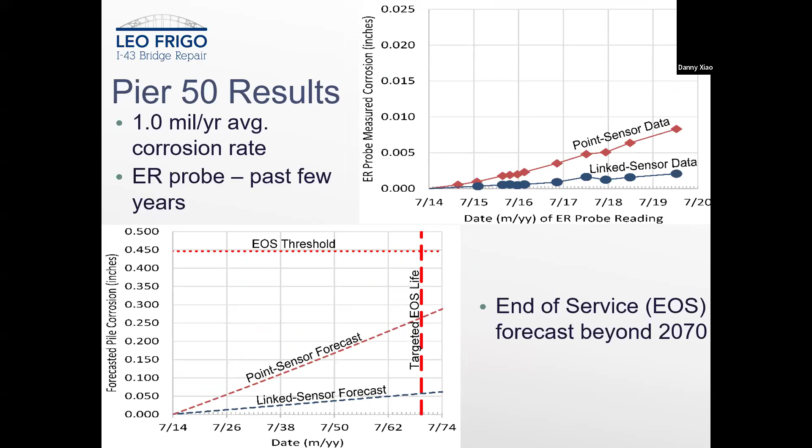Whereas at Pier 13, it's a little bit longer. And meanwhile, at Pier 50, which is as far away from the river as we can get, we're actually in good shape. So what does all that mean, really? What that really means is that we recognize that the setting for all of those piers presents a problem. And as we've continued to monitor them, there's actually a design project underway where they're going to be further addressing what's going on with some of these other piers and bolster them to make sure that there's not an issue. And so now as we approach the top of the hour, photo moment from Danny.

Just a few final shots of kind of what it looked like. This was the cold January day. And I want to emphasize again. Last month, I was at Iowa State, my alma mater, doing this presentation and talking to a lot of students, not unlike here. If you're a senior, you're not going to the career fair because you have a job. If you're a junior, you had a great internship. If you're a sophomore, you had an internship. If you're a freshman, you've been on campus for 2 months and you're probably going to get an internship. Things are very different than they were decades past.

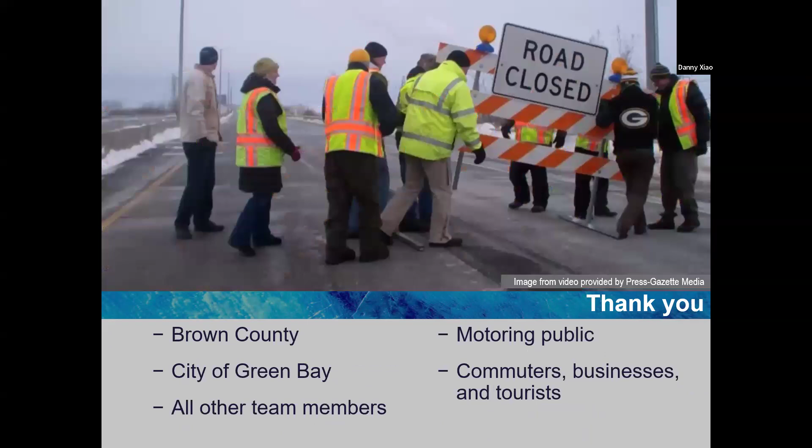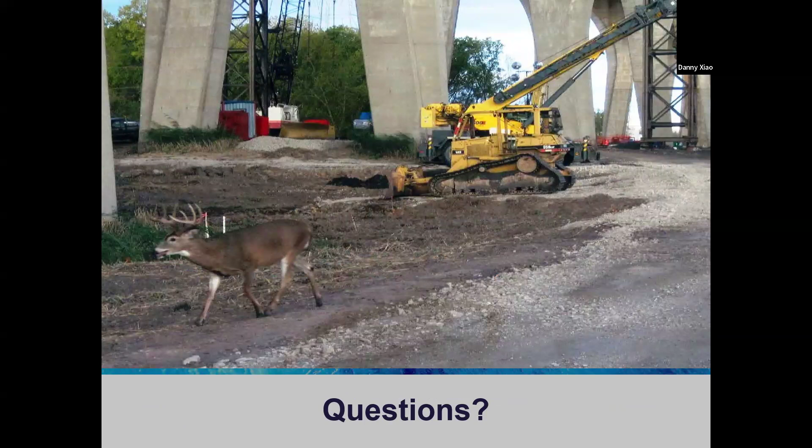When the pier settled, did it stay plumb? Generally, yes. It didn't really move, other than moving in the Z direction and going straight down; it did not have really any perceptible movement in the X or Y.

Question? You're like, no, I'm just leaning.

How much consensus was there among the engineering entities on the whole project? In other words, were there other alternatives to examine before they came on this? So the question is, how much consensus? During what we'll refer to as the discussion phase, where people are floating alternative theories, presenting pieces of information that would suggest or support it.

I think there was a good amount of discussion because there was not this one aha moment where we said, it's absolutely this. As we got more information, not just at the one pier but at the other piers, everybody eventually coalesced around that specific hypothesis. But even then, the hypothesis was never that it's just one thing, but the interaction of things.